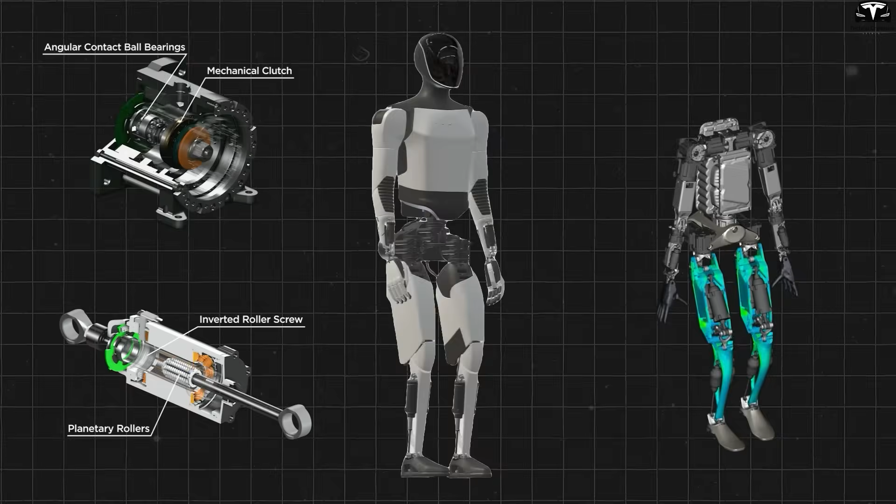We've got one major hardware revision, which should be done by end of this year or early next. Completing the hardware is a crucial step for Tesla Optimus to adapt to and effectively handle a wide range of household tasks. Precision in design allows the robot to operate smoothly, saving users both time and effort. So how will the improved design enhance Optimus's performance?

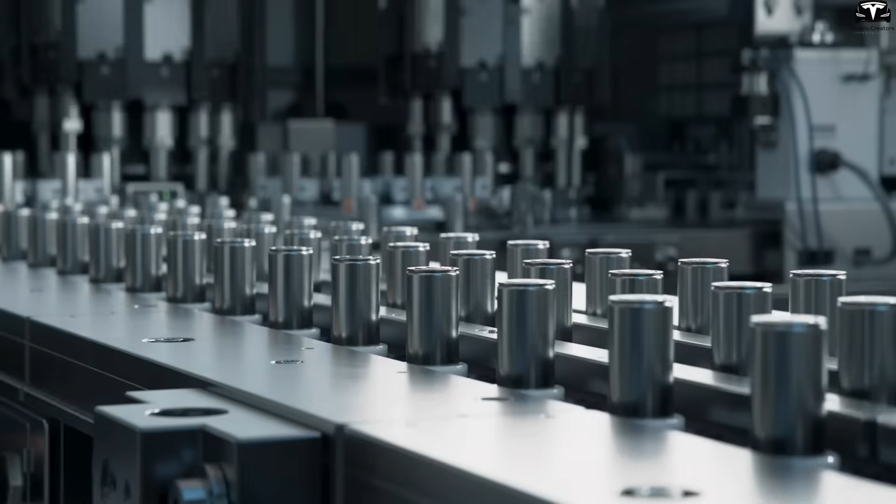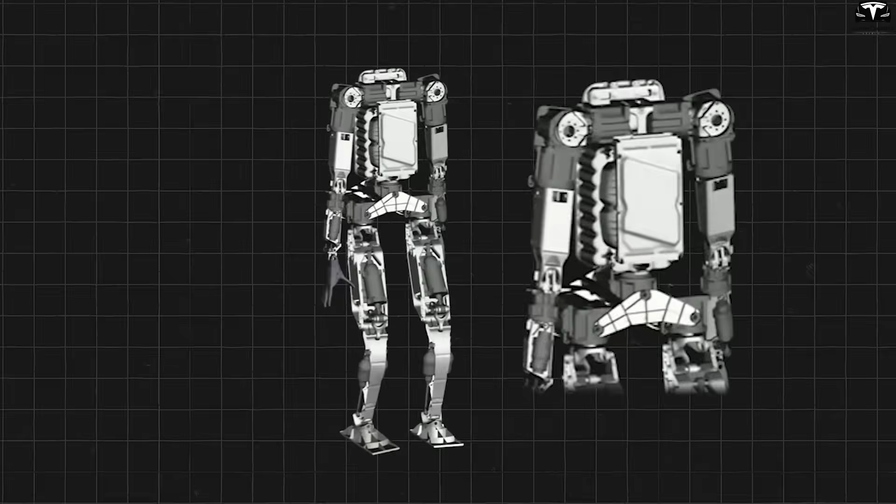How does the power supply system of Tesla's Optimus work? Tesla is currently using its familiar 4680 battery cell to power the Optimus robot, but not everyone agrees that this is the most optimal choice for a humanoid robot. While the robot's body is large enough to accommodate these oversized battery cells, achieving the necessary voltage level around 48 volts requires Optimus to use about 90 cells.

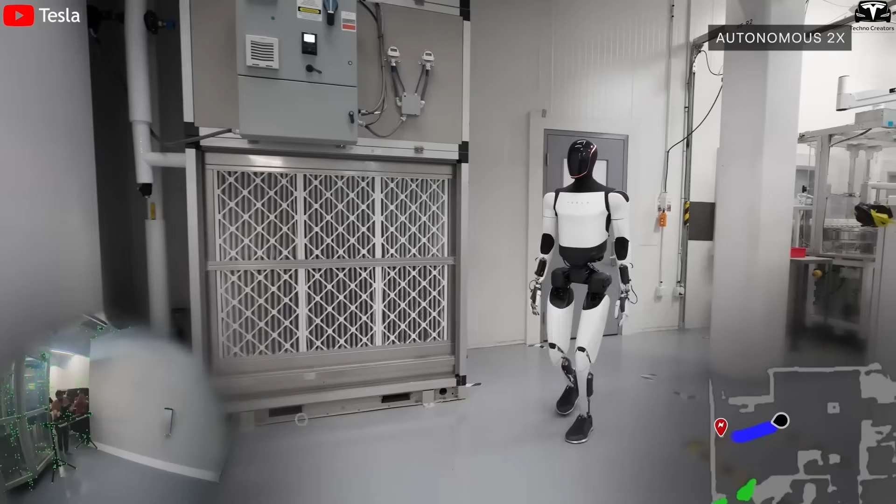Tesla has revealed that the total battery capacity is 2.3 kilowatt-hours, which is enough for the robot to operate continuously for 12 hours in a home environment, from walking around the kitchen and cleaning the living room to assisting in child or elderly care. After 12 hours, Optimus can autonomously return to a home charging station to recharge. The charging time is just about 1 hour, after which it can resume work. Since it is a robot, it doesn't need rest like humans, and can operate all day as long as it's recharged in time.

Tesla chose the 48-volt level because it's considered safe for human interaction. Higher voltages could be dangerous in close contact environments. However, to ensure stable operation and provide redundancy in case some cells fail, Optimus will likely require a modular battery system, dividing the battery into multiple 48-volt packs, connected in parallel. This approach boosts power output, improves replaceability, and is safer in case one module encounters an issue.

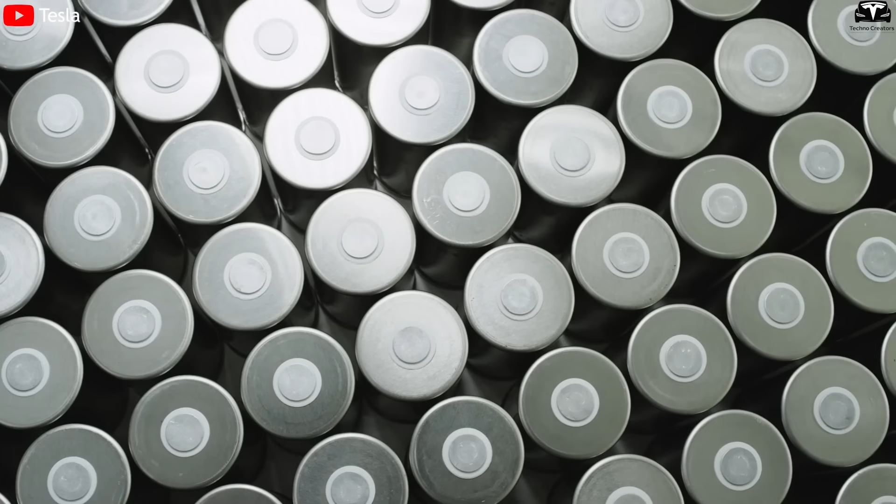With the 4680 cell offering around 26 amp-hours, using two 48-volt modules is enough to reach the 2.3 kilowatt-hour total. If smaller cells like the 2170, around 5 amp-hours, were used instead, about 10 modules would be needed, making the system more complex, taking up more space and increasing costs. Therefore, using large cells like the 4680 remains a sensible solution, especially since Tesla has full control over large-scale production at Giga Nevada.

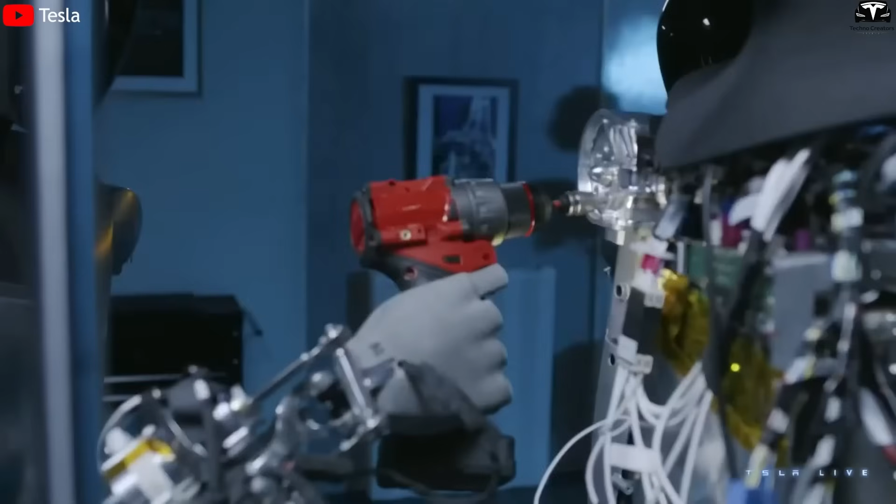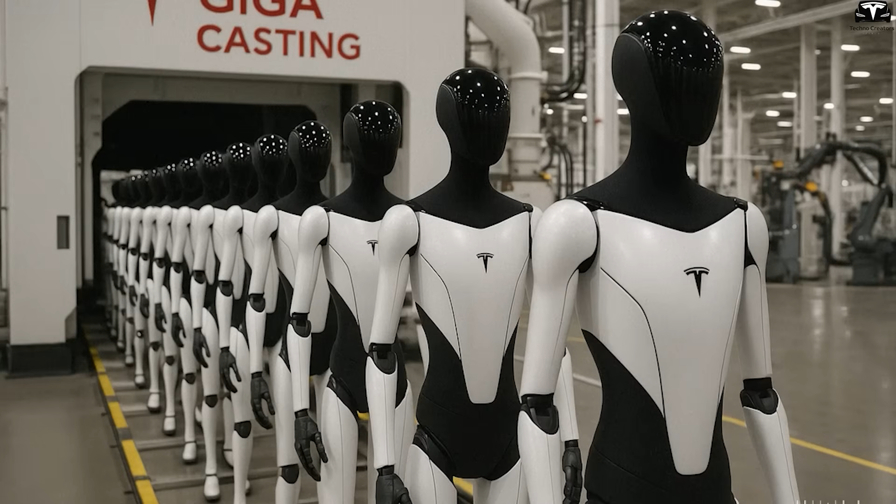Inside the factory, Optimus will face much more demanding tasks than home cleaning, such as lifting heavy objects, tightening bolts, and inspecting components, so the battery will drain faster. However, thanks to fast charging technology, it only takes about 30 minutes for the robot to recharge enough to resume a shift. Tesla may also implement a rotation model, where while one group of Optimus units is working, another group recharges, ensuring the production line runs without interruption.

Another interesting aspect is that Tesla may be integrating a regenerative energy system. This means when the robot lowers an object or moves slowly, some excess energy can be recovered and fed back into the battery. This helps extend the operating time without increasing battery size.

Moreover, Optimus's battery management system is integrated with AI. That means the robot can adjust its power consumption depending on the task, using less energy for light tasks and ramping up output for heavier ones. This is a major differentiator compared to rivals like Figure AI or Boston Dynamics, which still rely on traditional battery systems.

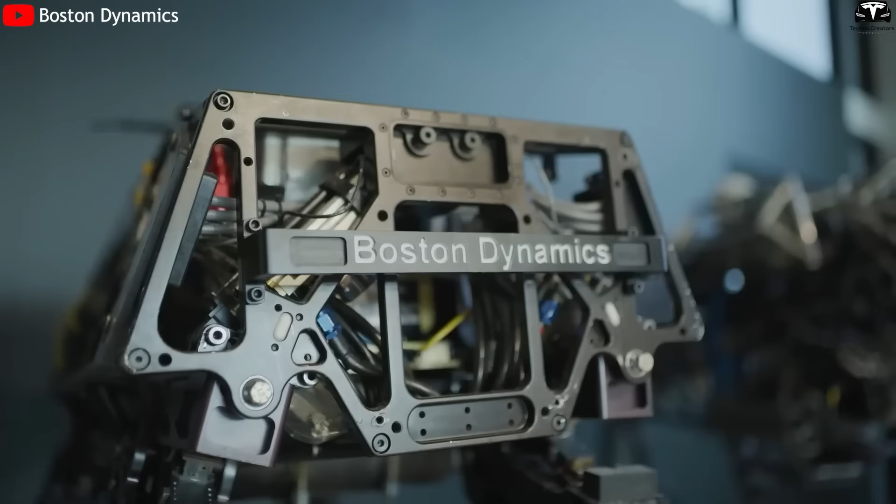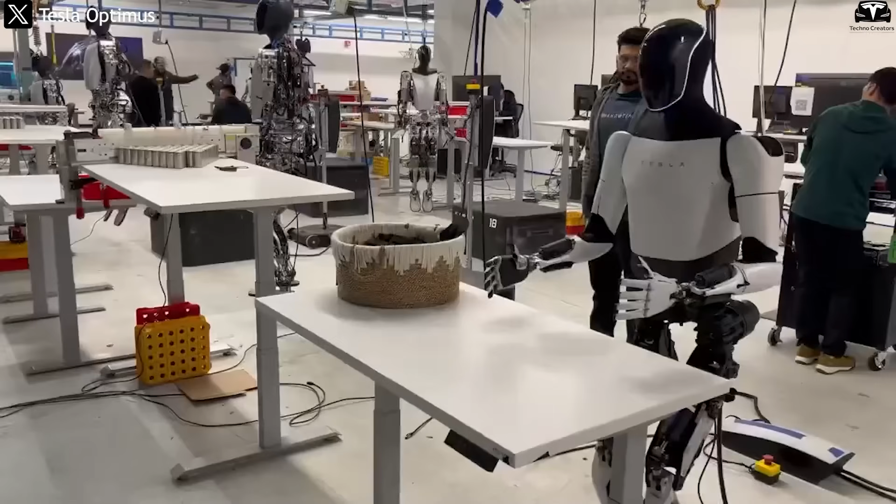In the future, Tesla may also experiment with solid-state batteries for next-generation robots. These batteries are smaller, lighter, store more energy, and generate less heat. If that happens, Optimus could operate twice as long without adding weight, extremely beneficial for industrial or service environments. In summary, although there is still some debate around using 4680 cells for Optimus, given Tesla's long-term strategy and in-house battery production capabilities, this is a technically sound and cost-effective move.

What changes have been made to Optimus's charging system? At first, many assumed that Optimus would share the same charging system as Tesla's electric vehicles like the Model 3 or Cybertruck. However, reality turned out to be completely different.

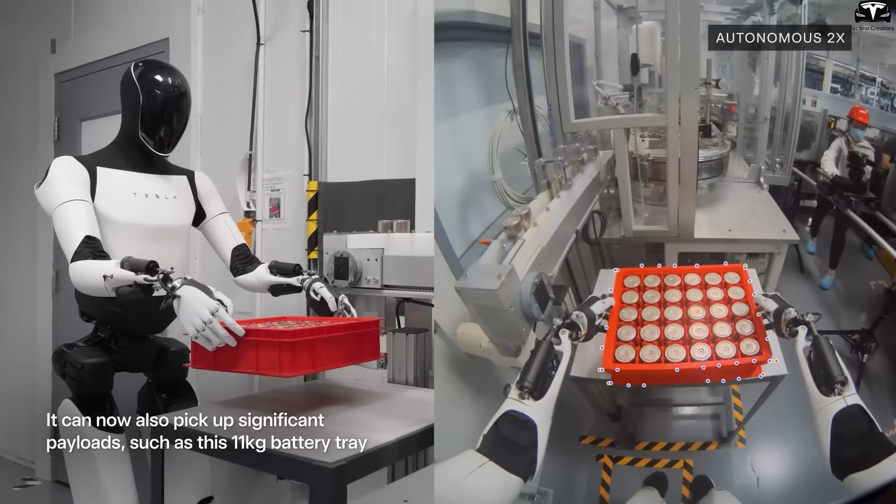In the testing video released by Tesla, Optimus is shown using a dedicated charging station, minimalist in design and highly mechanical in nature. Interestingly, when the battery level drops to 15%, the robot proactively stops working. The LED light on its head turns red as a warning signal, and it automatically activates its navigation system to seek out the nearest charging dock.

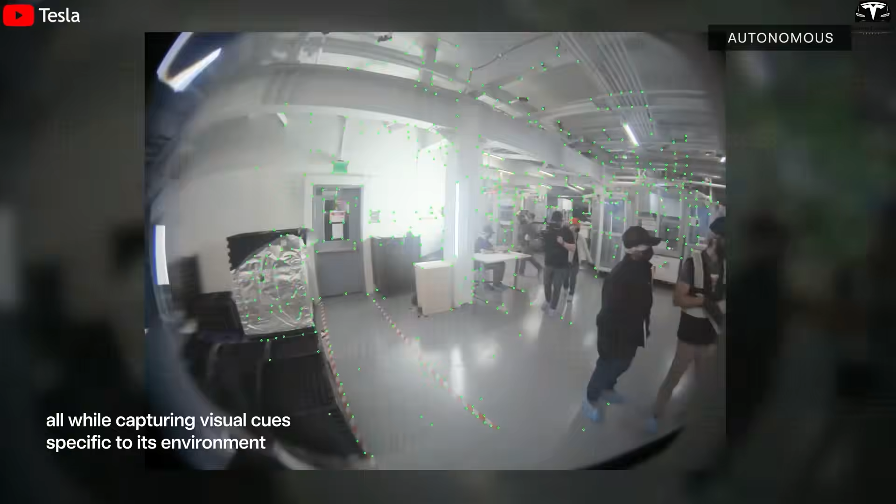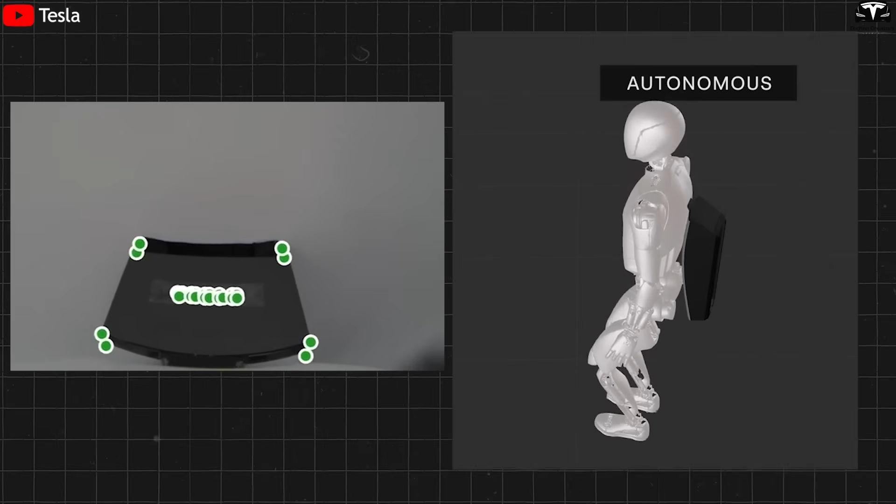What surprises many is the location of the charging port. It's on the back, not on the side or near the legs as previously speculated. This means Optimus must rely entirely on its cameras and visual sensors to precisely locate the charger and align its body so the charging connector can dock accurately, a process that must be both fast and gentle to avoid damaging the port.

Tesla clearly put a lot of effort into this aspect, as even a misalignment of just a few millimeters could prevent the robot from charging or cause wear on the connector.

Once fully charged, the LED turns green, signaling that the robot is ready to resume its tasks. Optimus then autonomously unplugs and continues working without any human intervention.

This entire process happens automatically, as if a diligent employee knows exactly when to take a break and when to return to work. One particularly unique feature of the charging system is that it's not just a stream of electricity flowing in. It's controlled by finely tuned algorithms that adjust the current based on the time of day, battery temperature,

and even the robot's usage history. Thanks to this, Optimus can charge quickly, without degrading battery lifespan, while always maintaining stable performance when it returns to work.

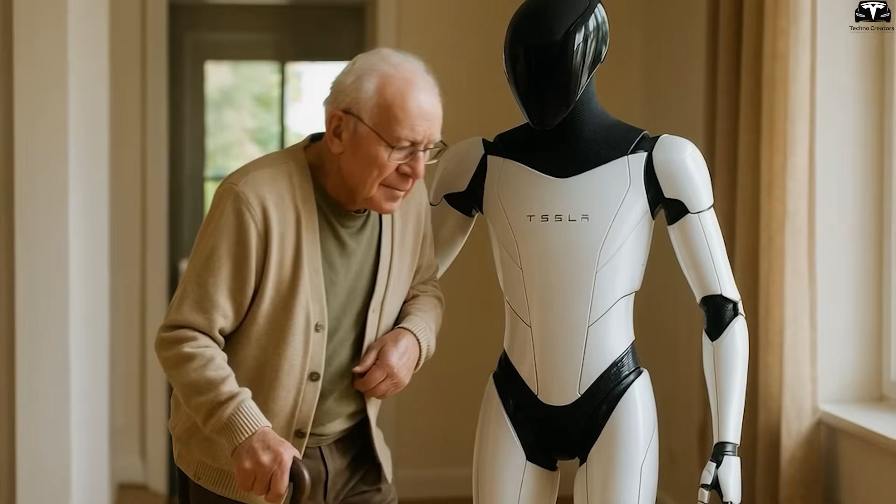This self-charging mechanism is reminiscent of the plug-and-charge system used in Tesla's Cybercab models, but it has now been adapted for humanoid robots, a major leap in flexibility.

Imagine a home or factory where Optimus roams freely, locating chargers whether embedded in a living room wall or tucked away in a factory corner, and recharging itself as naturally as a human grabbing a drink of water after tiring.

Even further, Optimus's system goes beyond smart charging. It enables shared learning. Just like people exchange messages in a group chat, every time an Optimus learns something from

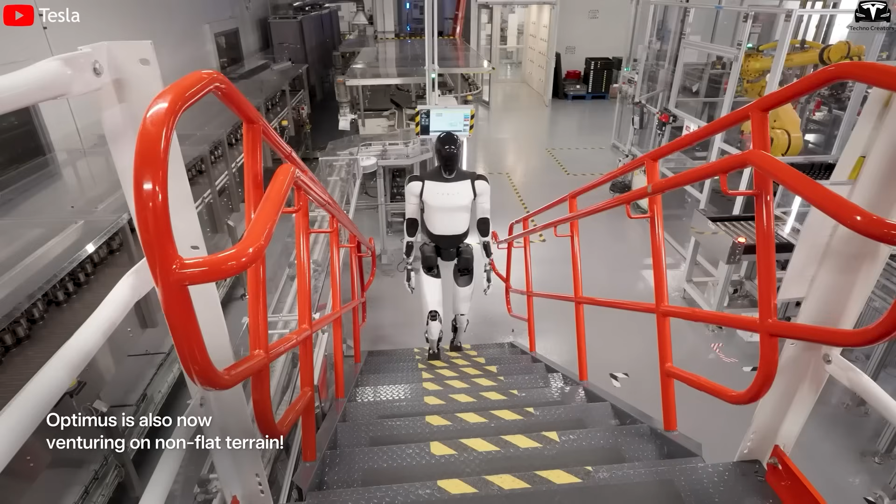avoiding an obstacle to optimizing movement in tight spaces, that knowledge is synchronized across the entire robot fleet. This means every Optimus improves together without each needing to learn from scratch.

Thanks to this group learning capability, if one Optimus in the Texas factory encounters an unfamiliar situation and solves it, just minutes later, an Optimus in Berlin or Shanghai will know how to handle it too.

Tesla refers to this as collective learning, a form of decentralized AI with rapid, cross-updating ability.

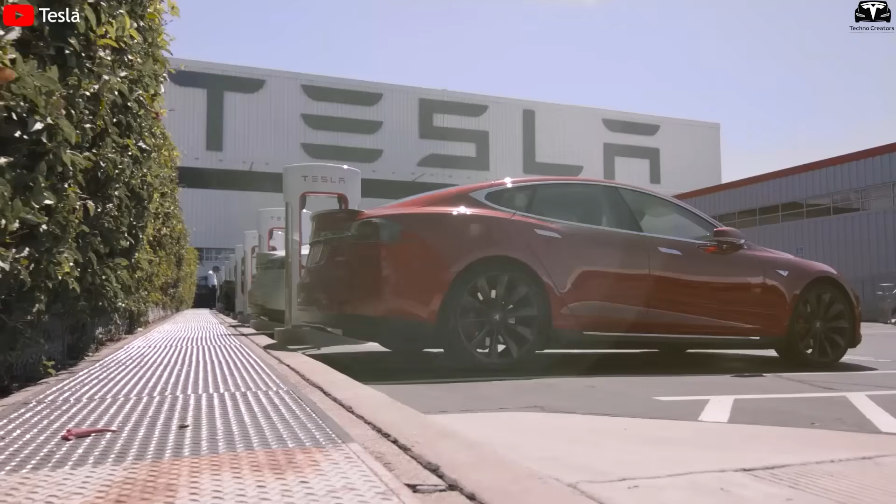At present, only Tesla can execute this at such a large scale because it owns the full stack: computing infrastructure, hardware, and real-world data. The ability to share movement maps, reflex behaviors, and even job-specific tricks means Optimus is not

just a robot that works, it's a living part of a continuously learning ecosystem.

This becomes especially valuable when Tesla deploys thousands of these robots across factories, where each Optimus has its own role, but operates in harmony with the rest like a well-synchronized team.

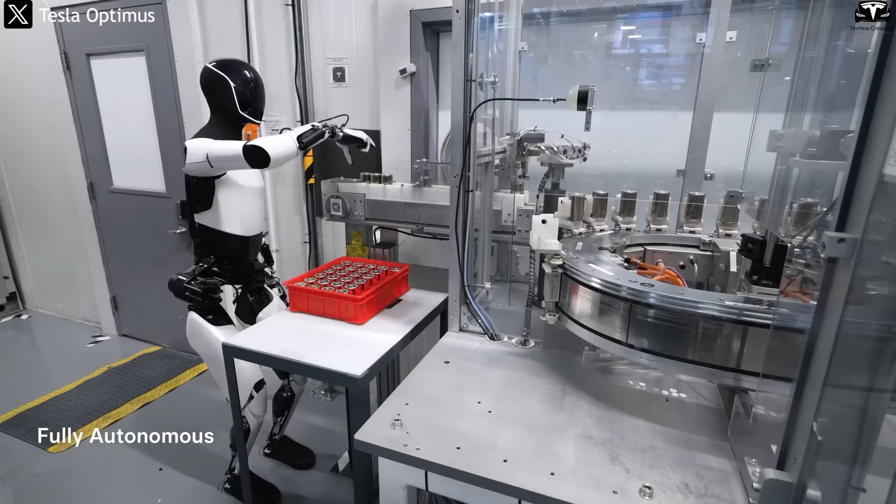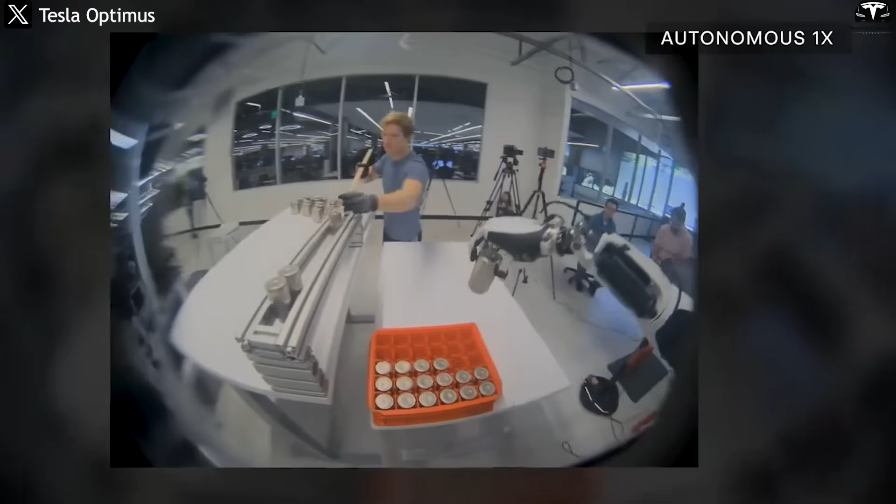In a real-world scenario, one could imagine hundreds of Optimus robots working in shifts unfazed by breaks, fatigue, or emotional lapses. Whenever energy is low, a robot silently retreats to the rear, while another steps up to take its place, ensuring the production cycle never breaks.

As a result, productivity could increase dozens or even hundreds of times compared to traditional labor models. All of this happens in silence, with order, and with astonishing precision.

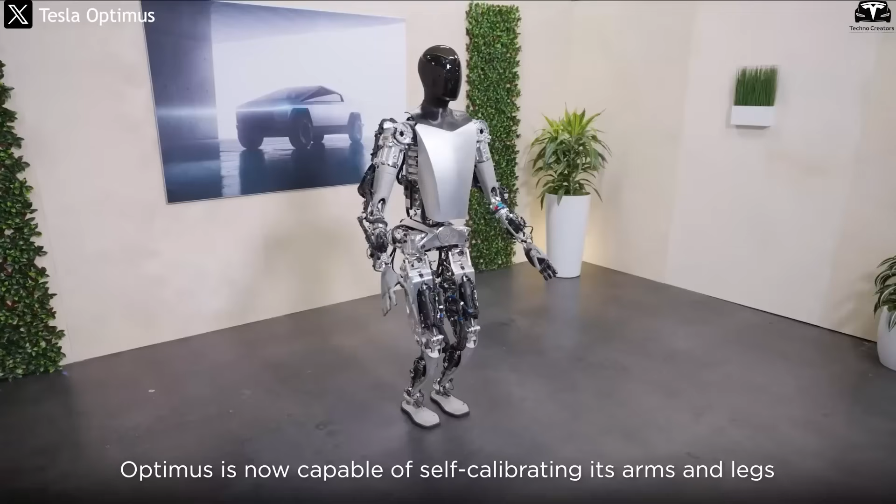The charging system, data connectivity, and self-adjusting capabilities of Optimus are not merely technological upgrades. They form the backbone of Tesla's vision for a fully autonomous robot workforce.

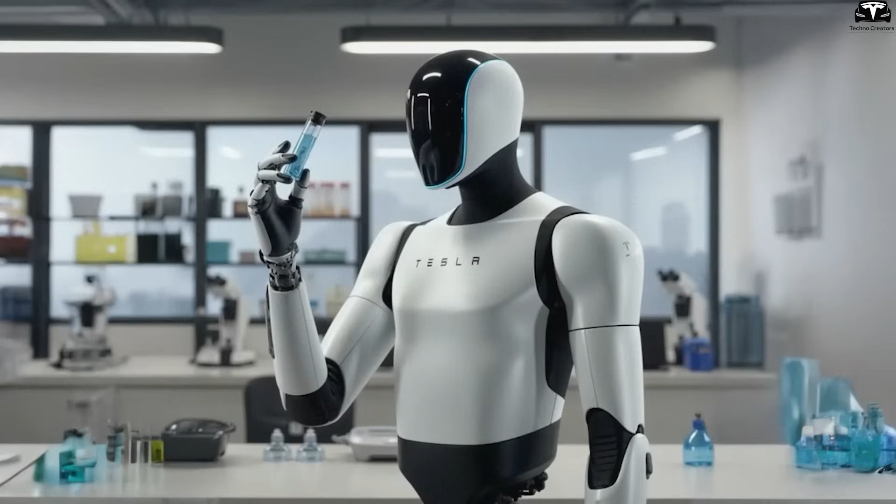This marks the beginning of a new era in automation, where machines don't just perform tasks, they learn, adapt, and evolve as part of a dynamic living network.

How does Optimus Gen 3 communicate with humans? One of the most significant upgrades in Optimus Gen 3 is its ability to communicate via voice, a feature confirmed by Elon Musk for the new version.

This marks a major leap from Optimus Gen 2, which operated silently with limited interaction. With storytelling capabilities, advice-giving, and casual conversation, the robot becomes not only easier to control, but also closer to being

a genuine companion in everyday life, something most robots on the market today have yet to achieve. Optimus Gen 3 is equipped with a 7-inch touchscreen on its torso, providing an intuitive, interactive interface.

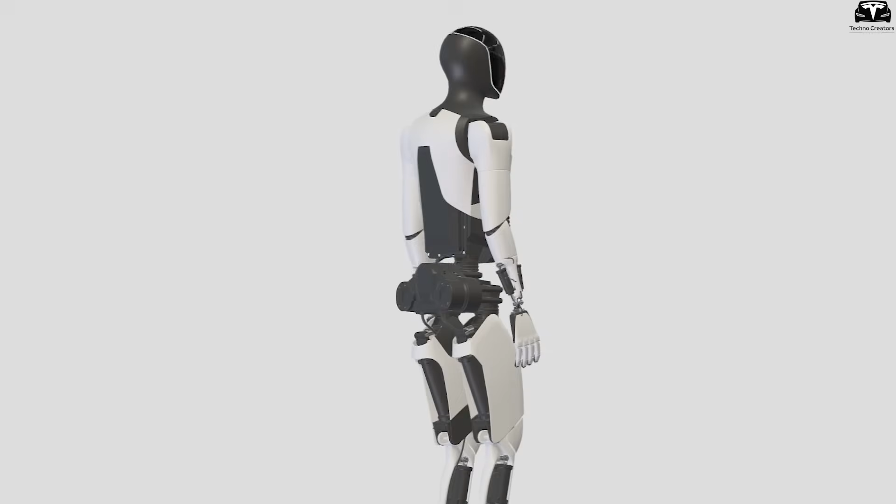Its voice control system supports up to 15 languages and features a speech recognition accuracy of 95%, along with gesture analysis capability reaching 90%, enabling it to comprehend body language as well.

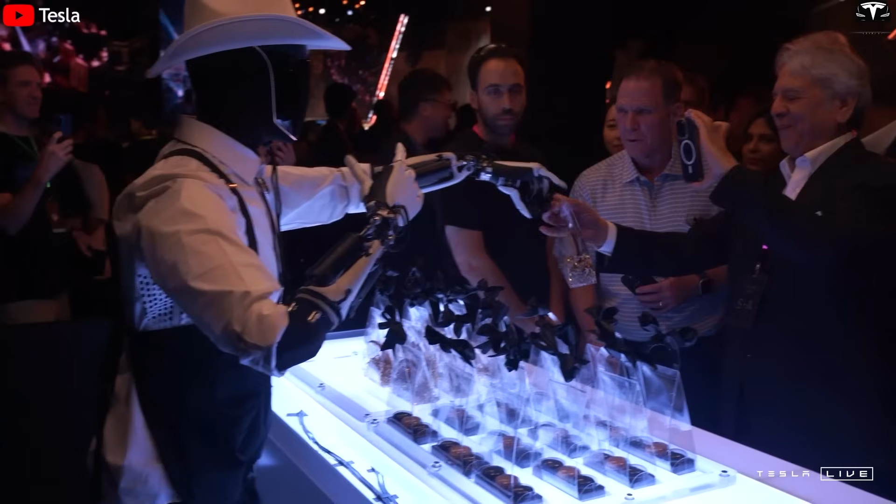This is particularly useful in home or healthcare settings, where understanding a user's intentions, both verbal and nonverbal, is crucial. This gives Optimus a clear edge over competitors like Figure AI or Digit, which emphasize locomotion but lack depth in human interaction and communication.

Beyond simply understanding and responding, Optimus Gen 3 can adapt its behavior to individual users through integrated AI models. This allows the robot to adjust its tone, attitude, and speech style based on the user's age, circumstances, and emotional state.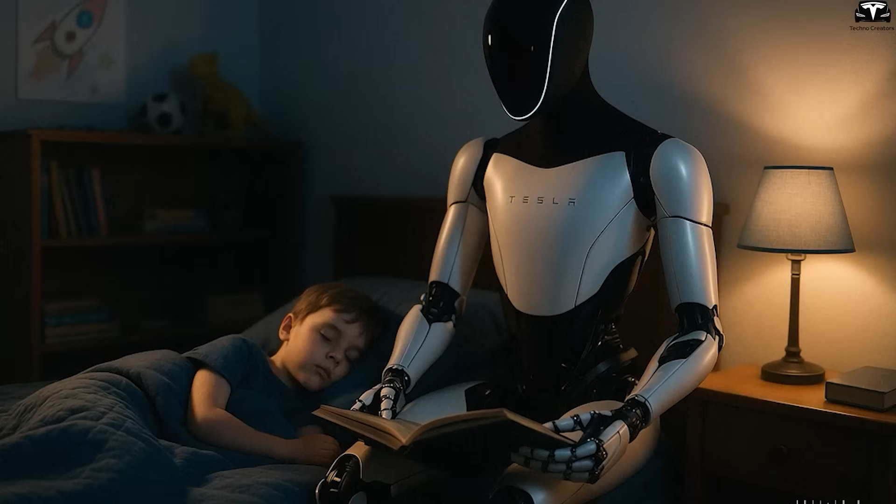For the elderly, it can speak in a calm, soothing tone, remind them to take medication, or share nostalgic stories. For children, it can be lively and playful, telling fairy tales or interacting as a learning and play companion.

This level of personalization far surpasses platforms like Alexa or Google Assistant, positioning Tesla as a pioneer in the personal interactive robot space.

This adaptability makes Optimus an ideal choice for households, where it can act not only as a support tool but also as a companion, caregiver, and even emotional therapist.

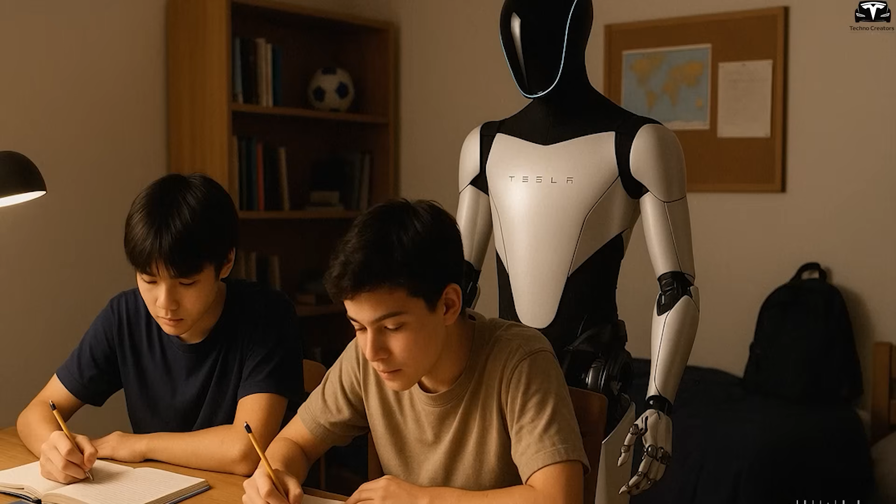With rapidly aging populations, especially in developed countries, the need for empathetic, supportive, and communicative devices is growing. Optimus can help the elderly monitor their health proactively, deliver timely reminders, and ease loneliness by providing someone to talk to. For children, it can serve as a learning assistant and playmate, opening up vast potential in interactive education.

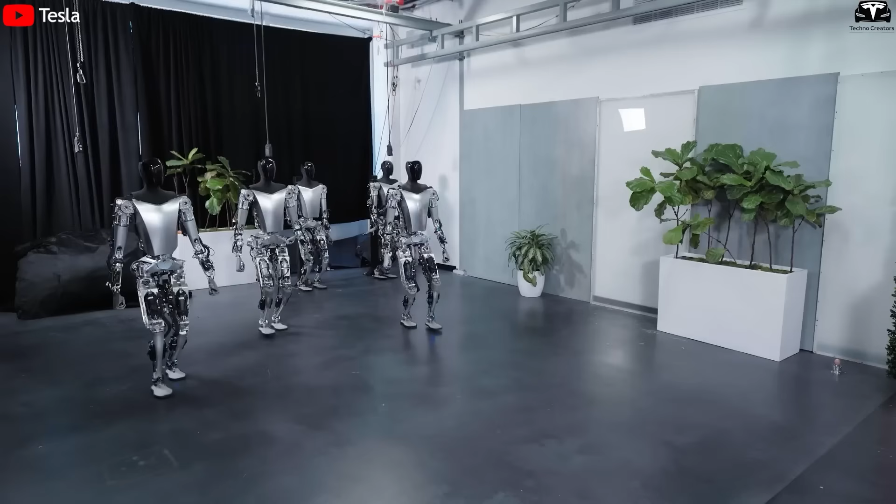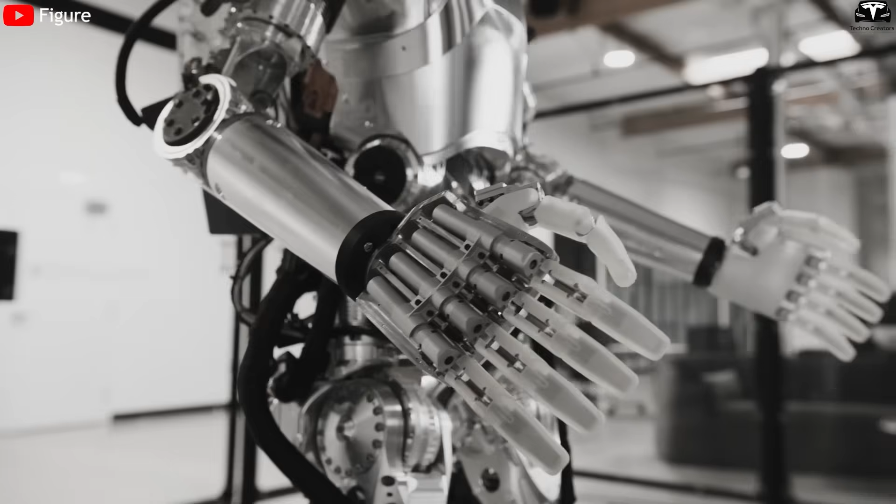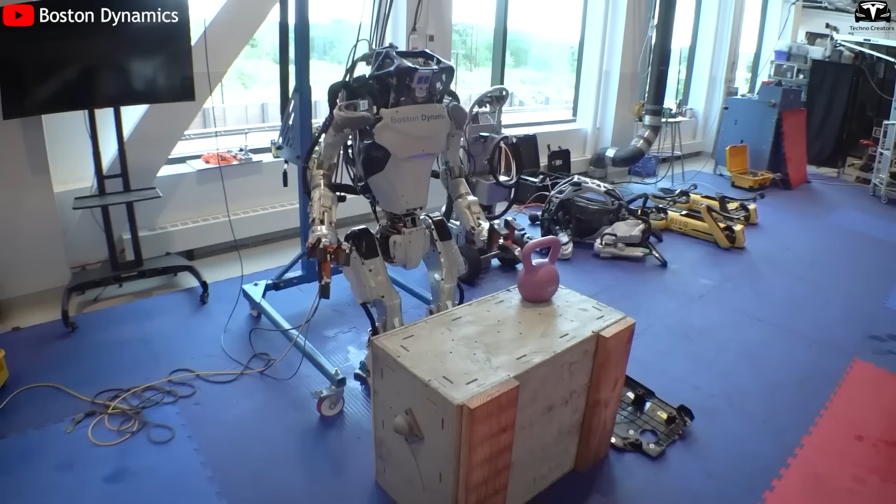Compared to its current competitors, Optimus Gen 3 is clearly ahead thanks to the seamless integration of hardware, software, and artificial intelligence. Figure AI's Figure 01 has achieved walking and object handling capabilities, but lacks a voice communication or behavioral system. Boston Dynamics' Atlas impresses with complex mobility, but it doesn't focus on human communication or emotional understanding. Even service robots like SoftBank's Pepper, though capable of basic conversation, remain limited to simple responses and cannot tailor behavior to individual users.

Tesla, on the other hand, leverages its immense AI training ecosystem, from billions of kilometers of autonomous driving data to home cameras, smart devices, and image recognition technology, to build a robotic platform that understands and learns more like a human than any competitor.

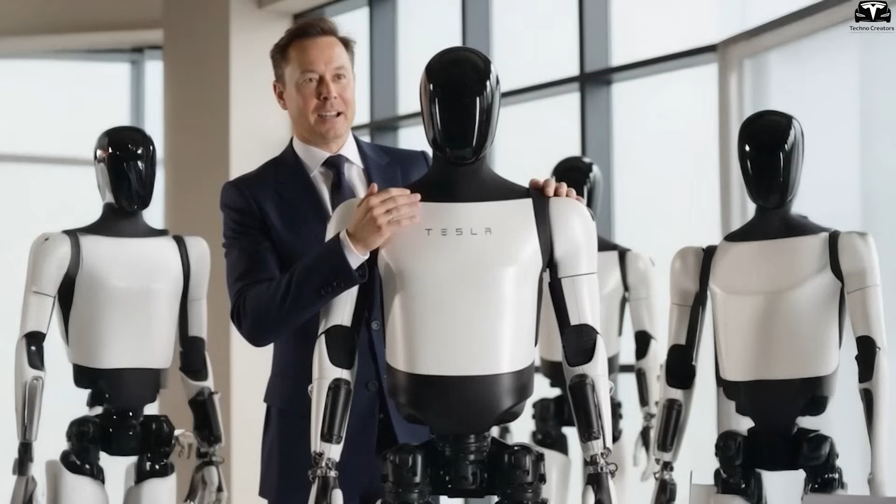Optimus Gen 3 is not merely a communication robot. It also serves as the control hub of a smart home. Integrated with the Tesla home ecosystem, the robot can connect with and control lighting, air conditioning, door locks, curtains, heating systems, security cameras, and even Powerwall energy storage units. This turns Optimus into a context-aware smart butler, automatically closing windows when it rains, opening curtains at sunrise, or issuing alerts when unfamiliar individuals are detected. This holistic vision far exceeds that of current rivals, which mostly focus on movement or isolated reactions.

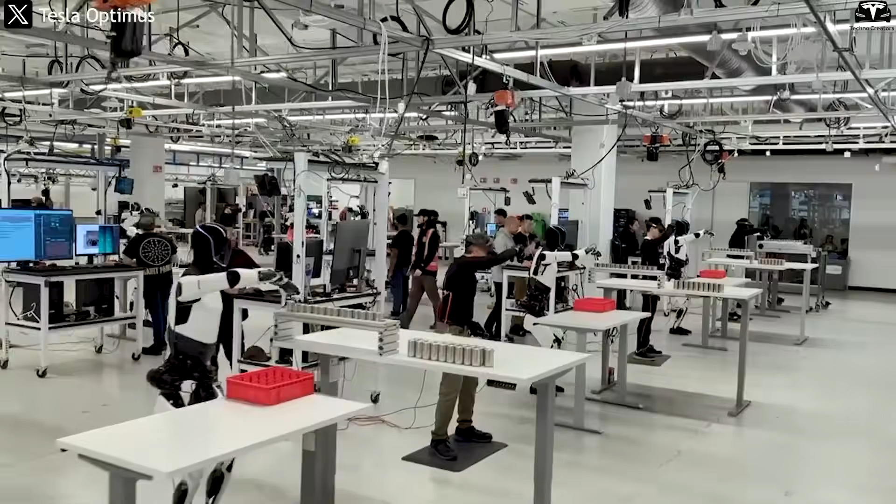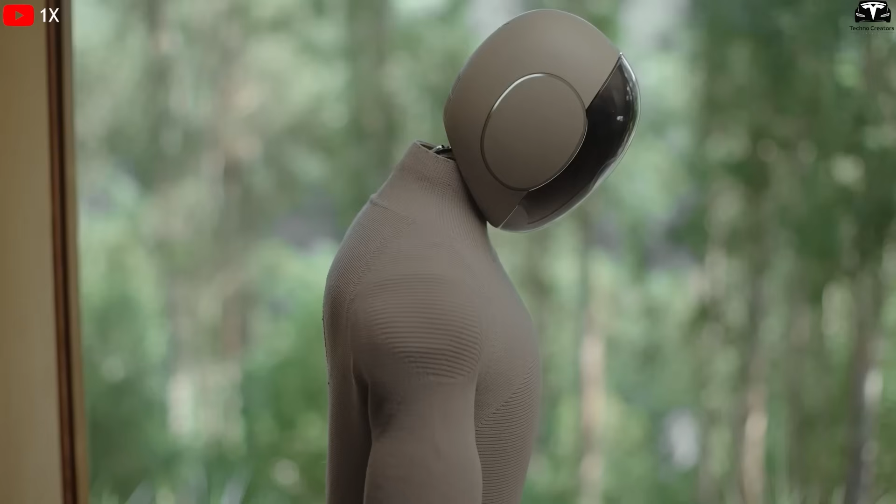From a socio-economic perspective, the arrival of Optimus Gen 3 signals a transformative shift in how humans approach labor and caregiving. If Tesla can produce 10,000 units annually and gradually reduce the cost to below $20,000 per unit, then deploying just a few million units could establish a trillion-dollar robot industry. In sectors like healthcare, education, retail, and in-home services, a robot capable of intelligent communication, emotional awareness, and task efficiency would significantly reshape labor structures, especially in countries facing labor shortages.

Milan Kovac, a software engineer at Tesla Robotics, shared on X that Optimus Gen 3 is rapidly improving through full simulation training with reinforcement learning. The sim-to-real system has been optimized with key updates. The cable is only a safety precaution and doesn't affect performance. Early results show Tesla Bot is nearing high stability and refinement.

What makes Optimus Gen 3 improve so rapidly in such a short time?

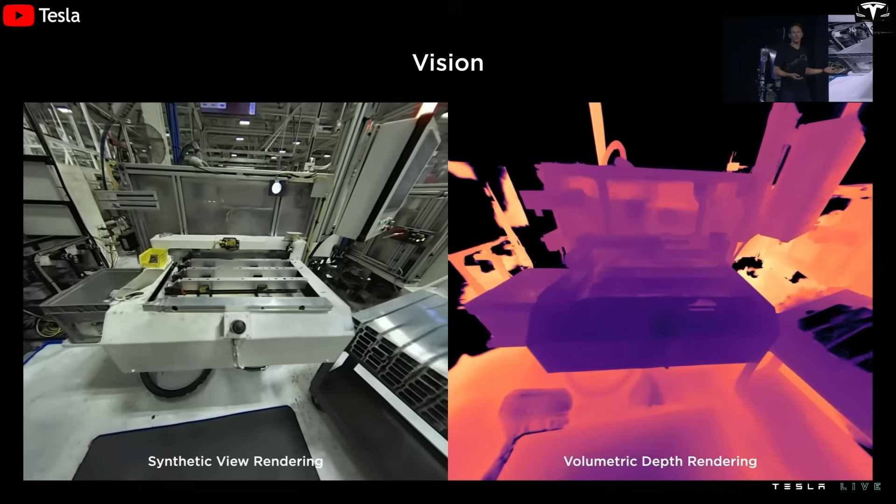What is Tesla aiming to achieve by training the Optimus robot through simulation? Tesla is taking a very modern approach to training the humanoid robot Optimus, training it entirely in a simulated environment using reinforcement learning (RL). This is a type of machine learning where the robot explores and improves its abilities through trial and error in millions of different simulated scenarios.

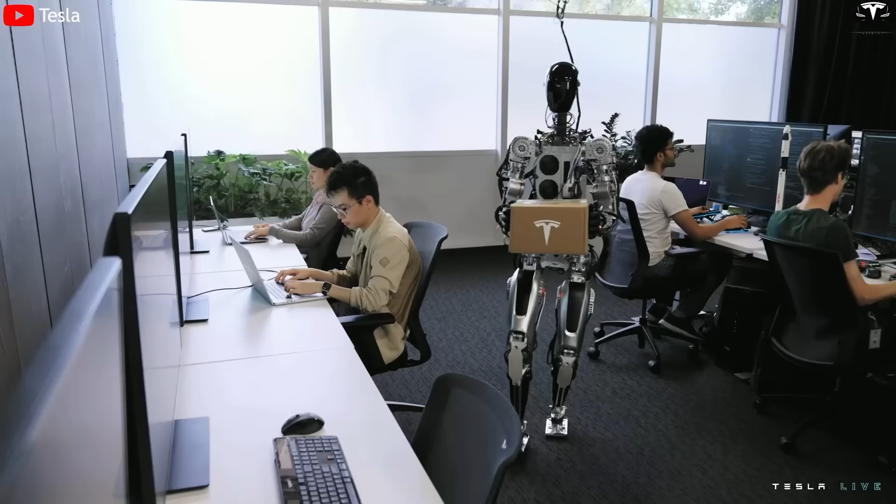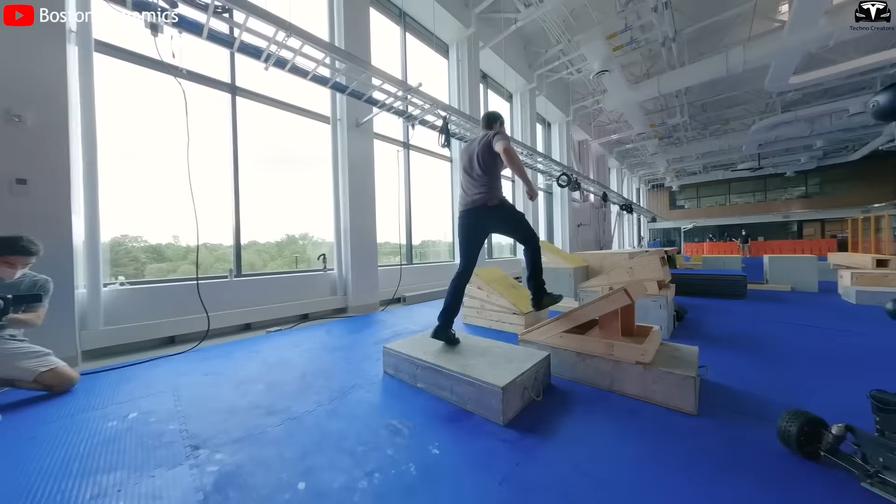What are the practical benefits and significance of training fully through simulation with reinforcement learning, RL? In reality, simulation training offers huge advantages, especially in saving time and costs. Instead of building complex physical models and testing each one, Tesla can quickly adjust factors in the virtual environment to try out various operational strategies. As a result, the improvement process becomes much more flexible, faster, and more efficient.

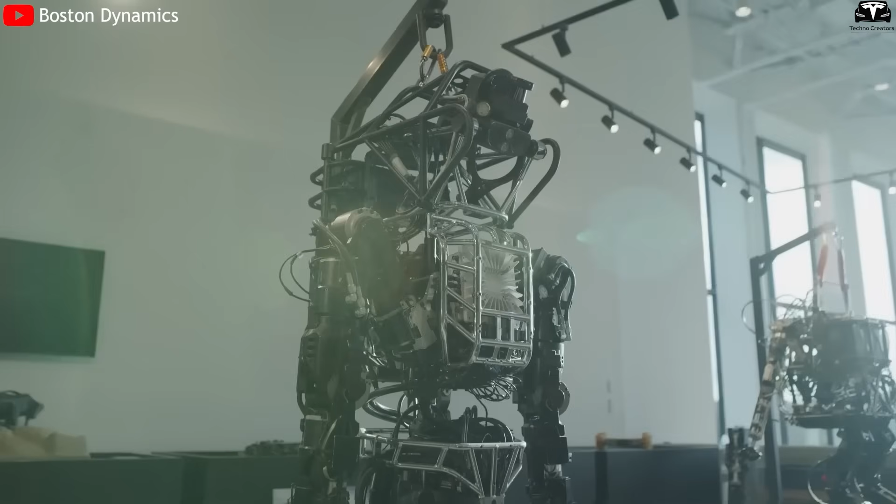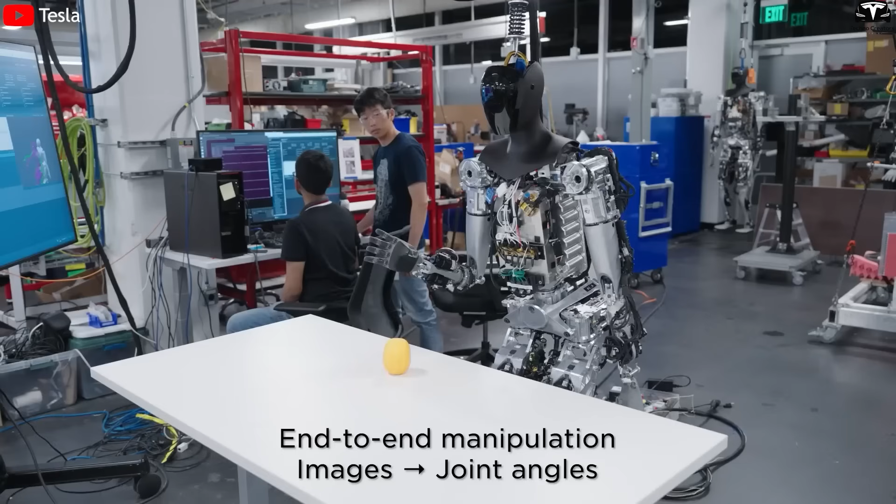Compared to other companies developing humanoid robots like Boston Dynamics with their Atlas robot, Tesla aims to accelerate progress by heavily investing in computing infrastructure and software. While other robots might take months or even years to master a basic skill, Tesla believes simulation can significantly shorten the stage. Every algorithm update can be tested immediately in the virtual environment without waiting for the physical robot. This is why Tesla is confident they can speed up the commercialization of Optimus, aiming for mass production in the near future. However, training in simulation does not mean the work is done.

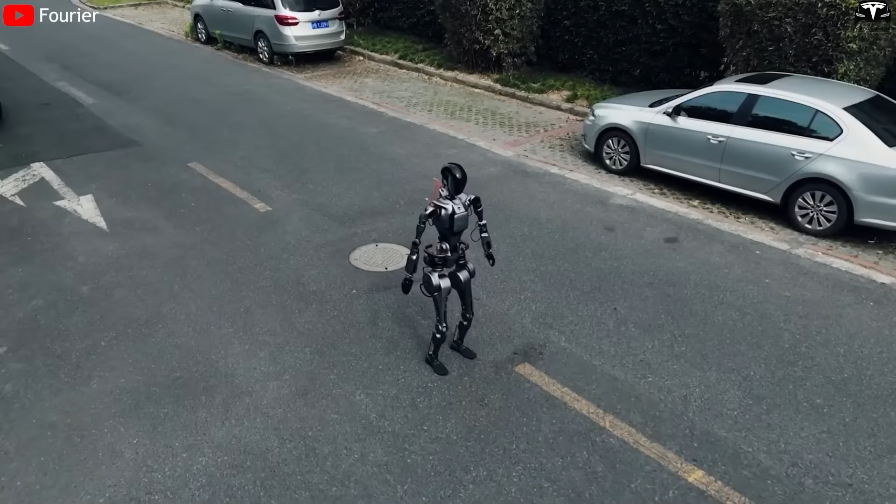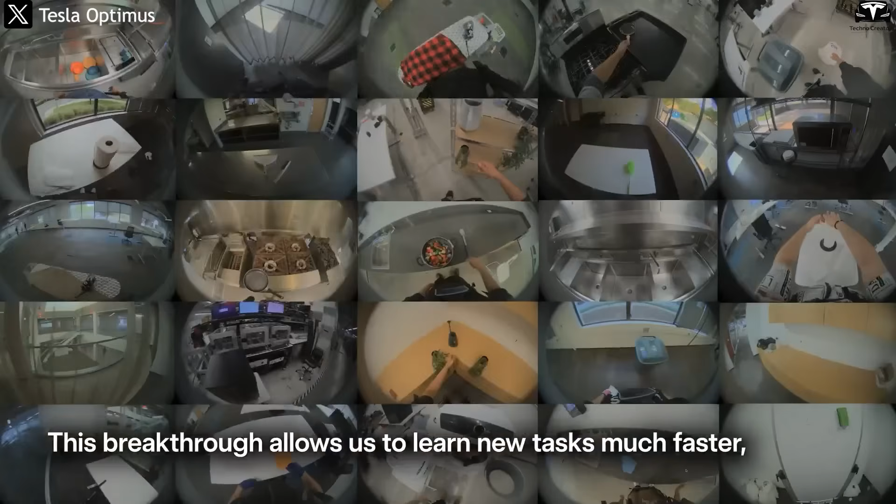There is another crucial step called sim-to-real transfer, which means transferring the skills learned in simulation to the real world. What role does optimizing and fixing errors in sim-to-real code play in robot development? In practice, the real environment always contains uncertainties and differences compared to simulation. If a robot is only good in virtual environments but clumsy in real life, it is useless. That's why Tesla focuses heavily on optimizing sim-to-real code, minimizing the gap between what the robot learns in simulation and what it can actually perform in reality.

If not well handled, the transfer error can reach 20 to 30%, causing the robot to walk unsteadily, grasp incorrectly, or lose orientation. Therefore, Tesla continuously updates, patches, and refines the sim-to-real code to help Optimus work more smoothly and reliably in the real world. Another difference is that Tesla is not just targeting robots for warehouse or factory work like Figure AI or Agility Robotics, but wants to create a robot that can adapt to human living environments, from homes to factories.

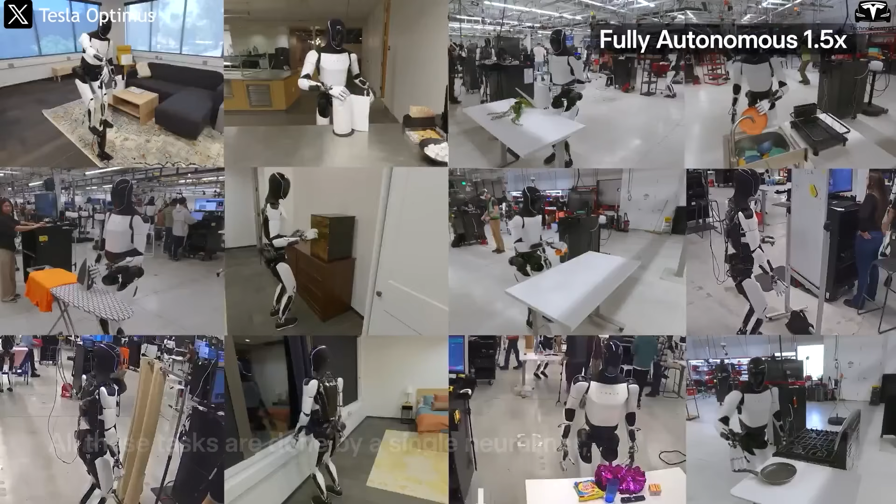This makes their sim-to-real challenge far more complex because the robot must handle many unpredictable situations. Carefully fine-tuning the transfer from simulation to reality is the key for Optimus to function well in diverse environments.

In Tesla's test videos, many have noticed that Optimus is supported by a cable during trials. Why does Tesla use support cables in the early testing phase, and how does it affect development?

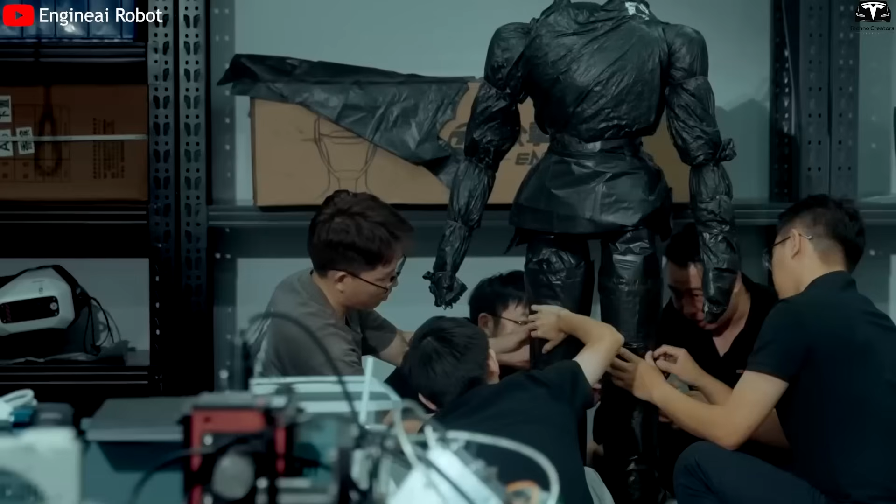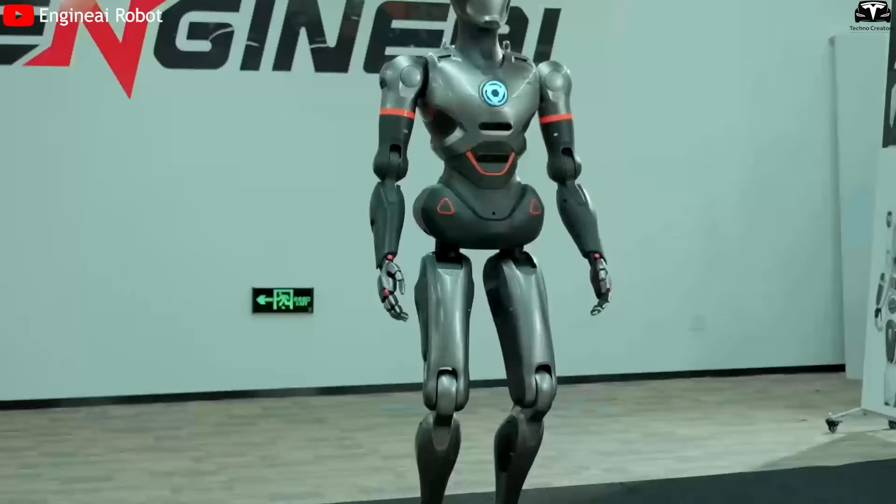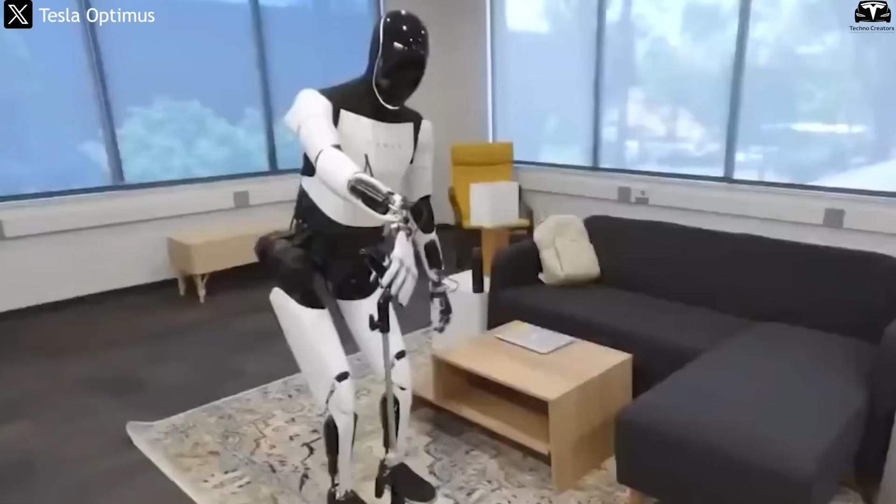Actually, using support cables is very common in the humanoid robotics industry. The main purpose is to prevent serious damage to the robot while it is learning to walk, lift objects, or maintain balance. Tesla also clearly explains that the cable is not to hold the robot still, but to prevent falls when control is not yet stable, especially in the early unstable phase. The cable makes testing safer and smoother.

Thanks to this, the development team can check many difficult movements without worrying about time-consuming repairs or reassembly after every fall. Boston Dynamics used this method when training Atlas, especially during flips, parkour, or moving over complex terrain. For Tesla, using cables is not only to protect hardware, but also to collect more accurate motion data that will be very valuable later for improving control algorithms.

Looking more broadly, the support cable also reflects Tesla's careful and strategic caution. They are not rushing but building solidly step by step. With this safety net, Tesla can upgrade software and perfect hardware simultaneously without interruptions when the robot encounters errors or malfunctions. This is the foundation that helps them soon reach the stage of testing without cables and be ready for mass production.

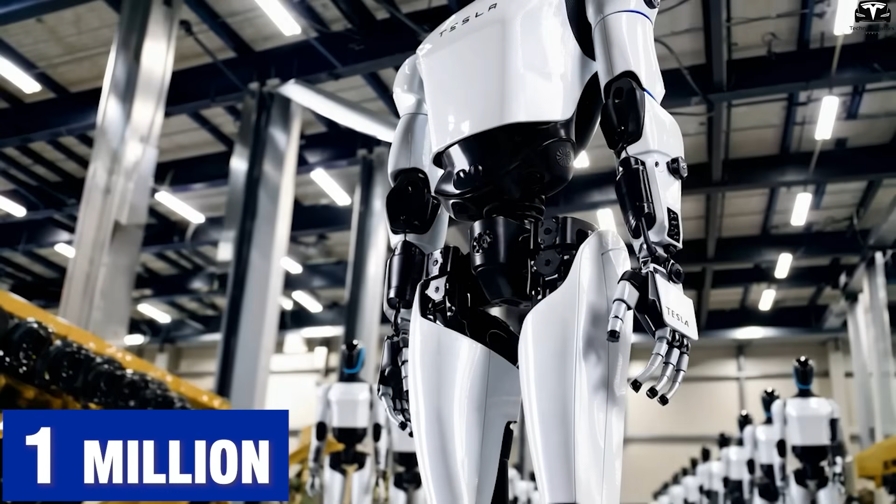Musk is confident that Optimus will scale faster than any product in Tesla's history, targeting production of up to 1 million units annually by around 2029 or 2030. This plan shows an ambition not just to remain at the experimental stage, but to popularize robots in industry and everyday life at an unprecedented scale.

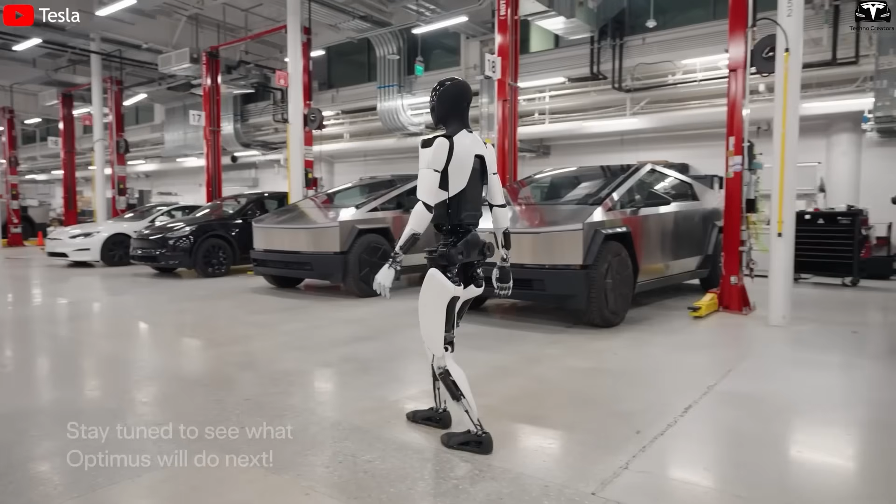At Tesla's Palo Alto laboratory, clear technical progress has been recorded as Optimus can move autonomously in the office, self-charge, and perform tasks flexibly. This not only demonstrates mobility, but also operational autonomy, an essential factor for robots to work effectively in real environments without continuous supervision. This forms the foundation for the rapid expansion Musk mentioned.

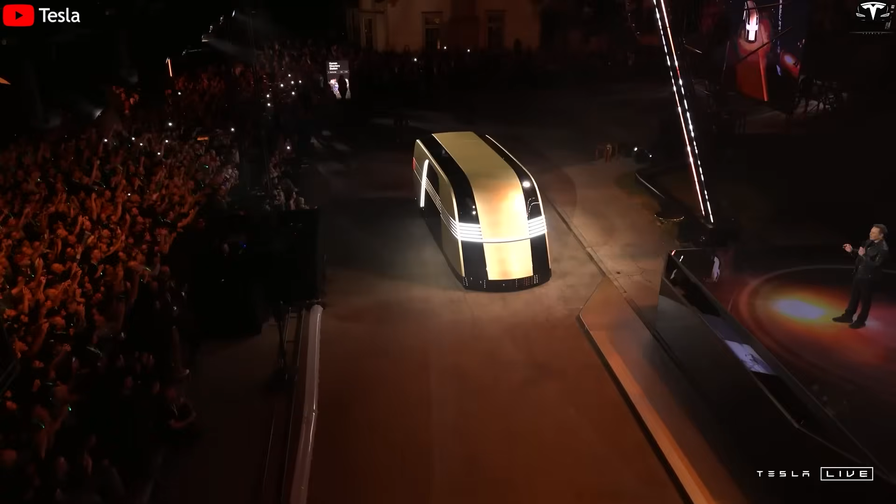In a discussion with Microsoft CEO Satya Nadella, Musk emphasized the practical foundation for robot development. Robotaxi needs to drive safely and precisely, while Optimus must complete assigned tasks accurately. This reflects Tesla's clear vision that robots should not only be demonstration technology, but also meet safety standards and practical performance to deliver real value to users.

Tesla actively showcased Optimus at the We Robot event, with performances serving drinks, customer interaction, and intricate dancing, proving coordination of complex movements and improvements in mechanical and software motion control. The latest dance videos released by Tesla show the robot increasingly demonstrating softness, precision, and flexibility, signs of breakthrough progress in refining control algorithms and mechanical structures.

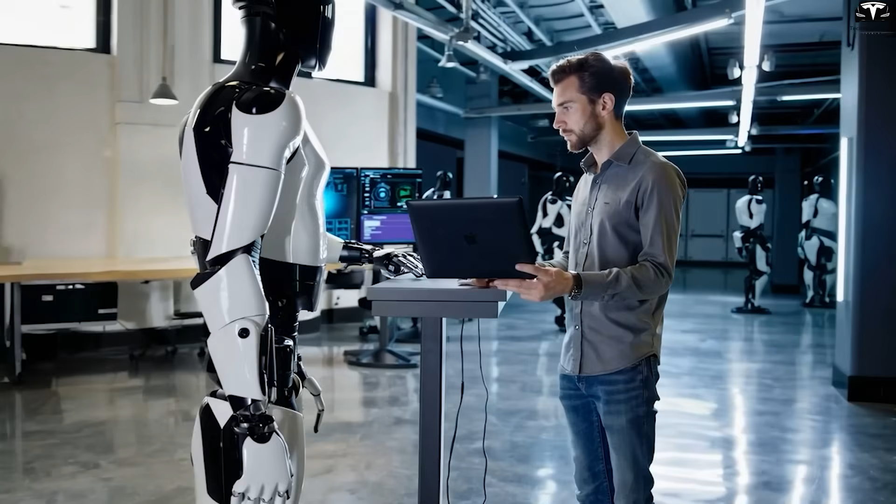Regarding production, Tesla has started limited Optimus manufacturing at the Fremont factory, aiming for over 1,000 units for internal use in 2025, paving the way for market sales in 2026. This is a critical step to perfect the production process, test operational efficiency in real conditions, and accelerate upgrades before scaling up mass production. Internal manufacturing also helps Tesla fine-tune the robot based on real feedback from the factory, ensuring suitability for industrial applications.

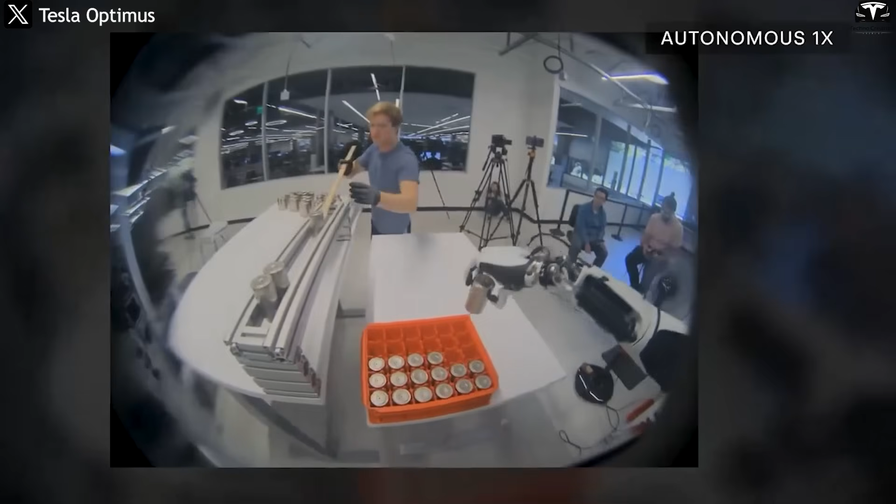Musk also highlights Optimus's huge market potential, valued at $25 trillion, larger than Tesla's automotive business. He believes the robot can reshape the global economy by automating repetitive, low-skill tasks, reducing production and service costs, and opening a prosperous era with cheaper goods and services, improving global living standards. This is a revolutionary vision where robots will not only assist, but transform the economy's functioning.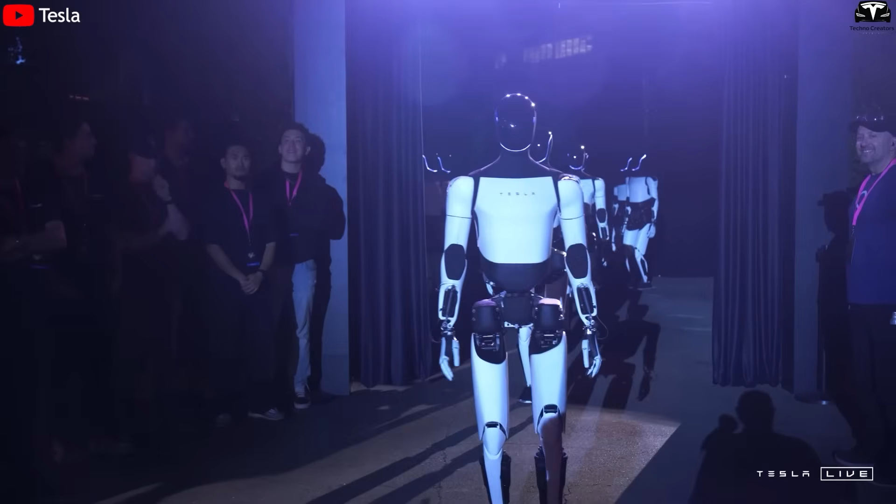Beyond industrial applications, Tesla Optimus has also been presented at diplomatic and public events, where robots performed dances to Trump's music in front of Saudi Arabia's Prince Mohammed bin Salman and President Donald Trump. The performance was not only entertaining but also demonstrated advancements in interaction and precise robot control, enhancing Tesla's image as a technology pioneer on the international stage.

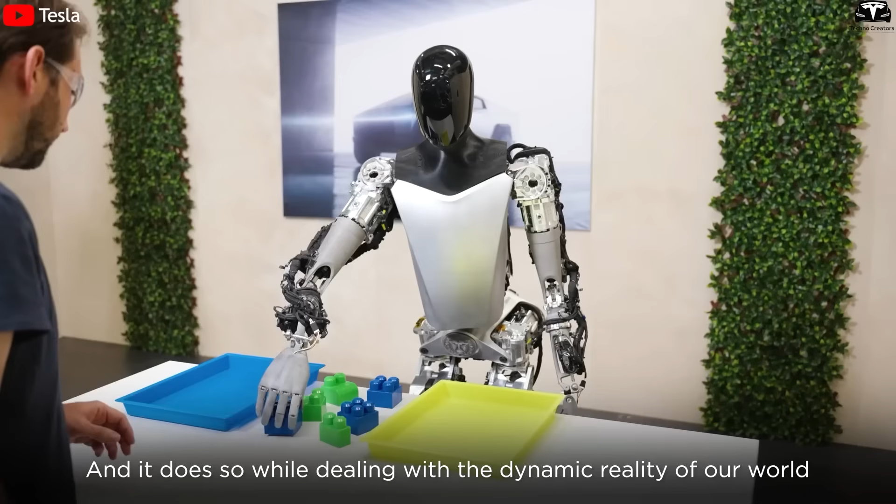Elon Musk emphasizes that training Optimus requires massive computational resources and time. For reference, large AI models like GPT-4 cost millions of dollars in computing during training. Tesla must invest similarly or more to train the robot's capabilities in environment recognition, movement, and diverse task execution.

Regarding competition, the Grok AI bot ranking, May 2025, places Tesla fifth among the world's top humanoid robot manufacturers. Boston Dynamics leads with Atlas due to complex movements like parkour.

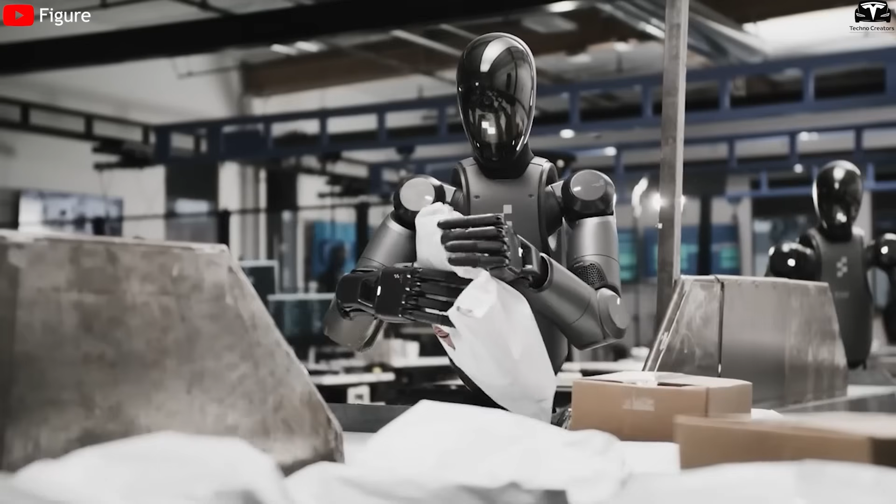Figure AI and Agility Robotics have deployed robots in factories and warehouses, showing advantages in practical applications. Tesla remains in the early stage, with a product not yet widely adopted, needing improvements in stability and production speed.

Tesla began limited Optimus production at the Fremont factory in Q1 2025, aiming for over 1,000 units internally in 2025, with market sales starting in 2026. Musk targets 1 million robots per year by 2029, increasing output by 1,000 times in 4 years, an unprecedented production ramp-up speed in robot or automotive history.

Musk predicts Optimus will become a common personal item, similar to C-3PO or R2-D2 from Star Wars.

With the robot industry's potential value reaching $25 trillion, Tesla expects to optimize repetitive, low-skill tasks, thereby reshaping the global economy. Introducing robots into daily life will reduce labor costs and improve quality of life, but also poses challenges for mass production and developing sophisticated control software.

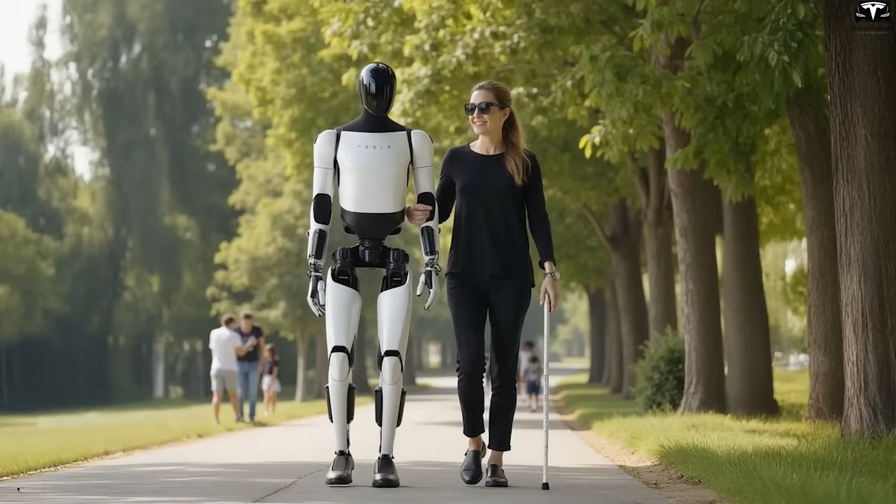Musk believes that within 4 to 5 years, Tesla can produce 1 million Optimus robots annually, launching a personal robot era for millions of households.

What approach is Tesla taking for Optimus in the Middle East? At the 2025 Qatar Economic Forum, Elon Musk captured the audience's attention by introducing Tesla Optimus, Tesla's ambitious humanoid robot. Although no specific plans for Qatar were announced, choosing the Middle East as the venue to showcase Optimus indicates that...

Musk is seriously considering expanding this robot's market into fast-growing economies eager for advanced technology. Could the Middle East be Optimus's next destination? At the event, Elon Musk emphasized plans to deploy thousands of Optimus robots within Tesla's own factories starting from the end of 2025, aiming to produce up to 1 million units annually by...

2027-2029. While bringing Optimus to Qatar may not be part of the initial phase, appearing at such a major international event clearly paves the way to connect with potential partners in the region. Given the rapid urbanization and strong interest in automation in the Middle East, especially in the UAE and Saudi Arabia, the prospects for Optimus there are well-founded.

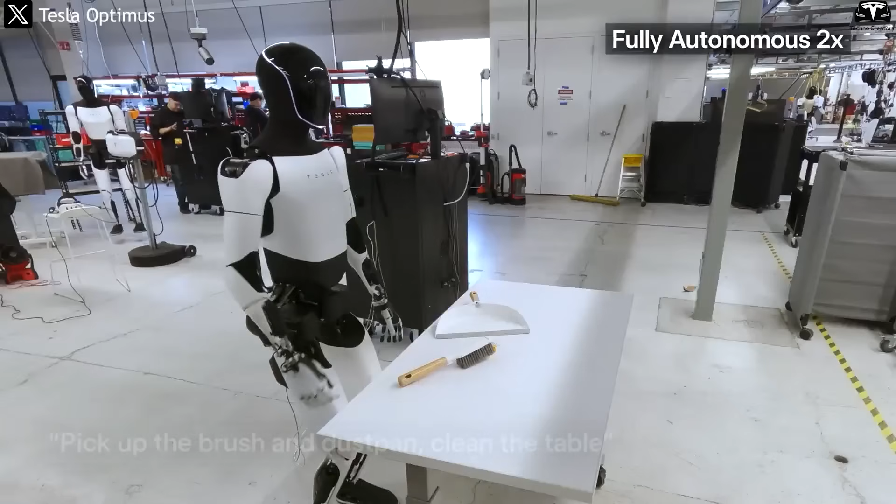In the latest videos released by Tesla, Optimus is shown not only in manufacturing environments, but also skillfully performing household chores such as stirring pots, cleaning tables, and vacuuming. This is a clear sign that Tesla does not want to limit Optimus to industrial settings. They are aiming for a humanoid robot that can serve in daily life, from assisting the elderly, managing household tasks, to handling miscellaneous chores. Is Optimus's ability to perform household tasks truly feasible in the coming years?

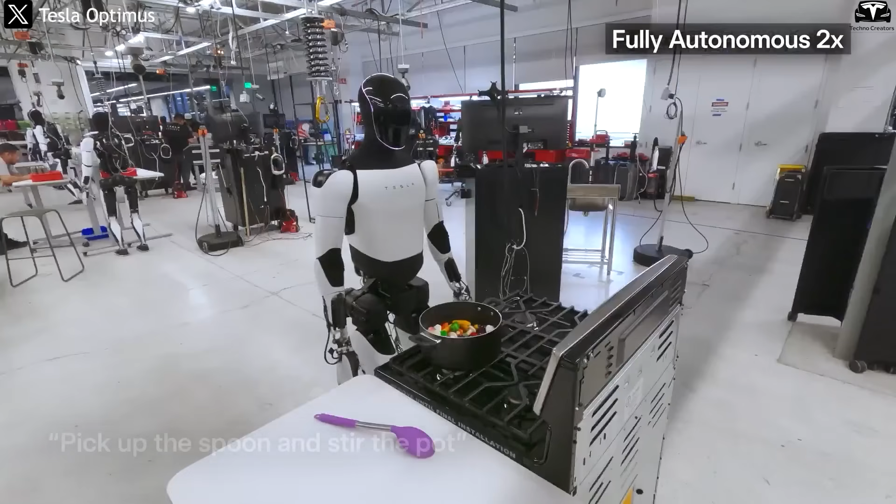Although these are still tests in controlled environments, the flexibility and precision demonstrated by Optimus have raised many expectations. To accomplish such tasks, the robot must possess superior sensing capabilities, excellent coordination of its hand joints, and the ability to respond adaptively to changing real-world conditions, something most robots today still struggle to achieve.

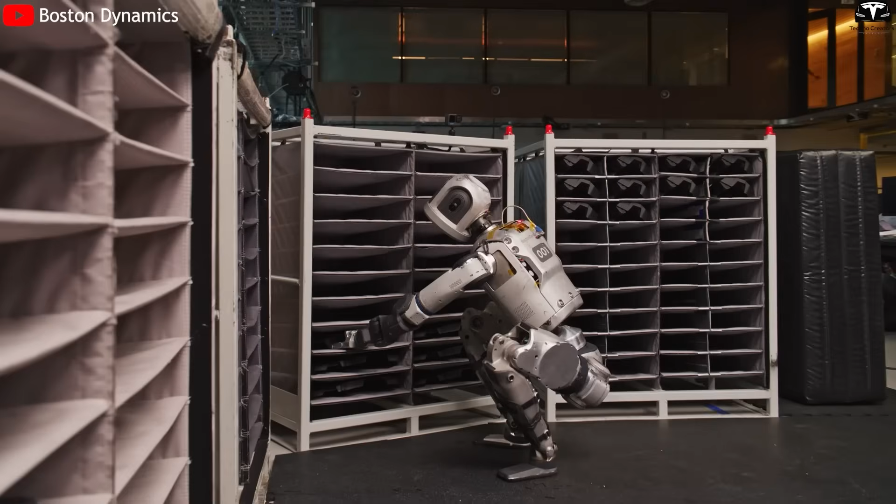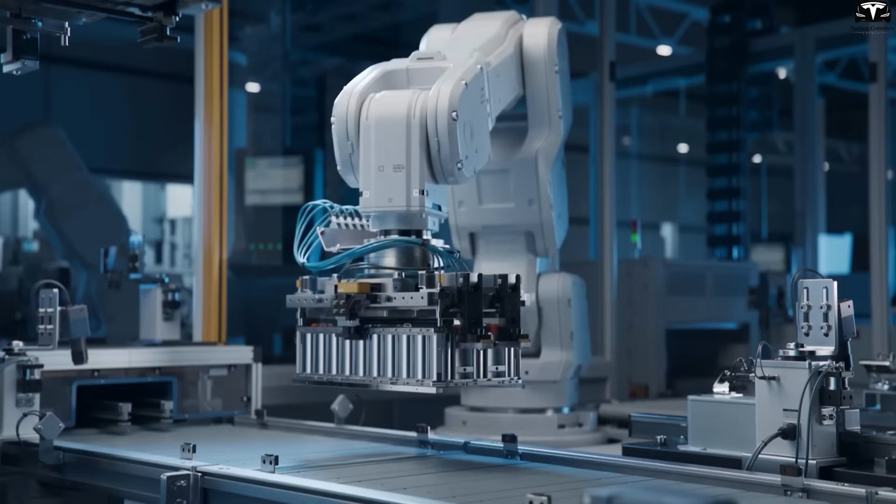Not everyone shares Elon Musk's optimism. Chris Walti, former head of the Optimus project, expressed skepticism, arguing that humanoid robots may not be suitable for production lines where high speed and absolute precision in repetitive tasks are required. According to him, fixed-arm robots, or those designed specifically for individual tasks, remain the better choice for current industrial needs.

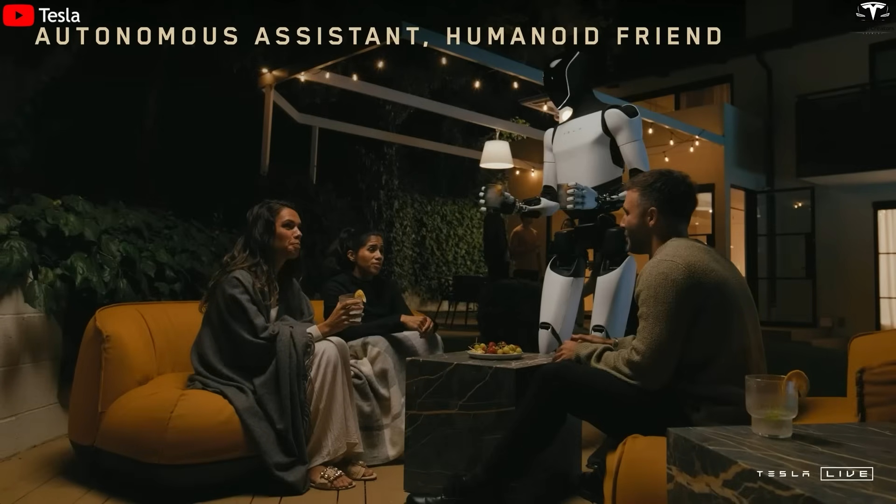So why is Tesla still committed to developing a humanoid robot? Elon Musk has a vision beyond manufacturing. For him, Optimus is not just a work tool, it is a universal worker capable of moving flexibly in human spaces, interacting naturally with the environment, and handling various situations.

Musk believes that in the future, humanoid robots will be able to replace humans in many roles, not only in factories but also in hospitals, schools, restaurants, and even space missions.

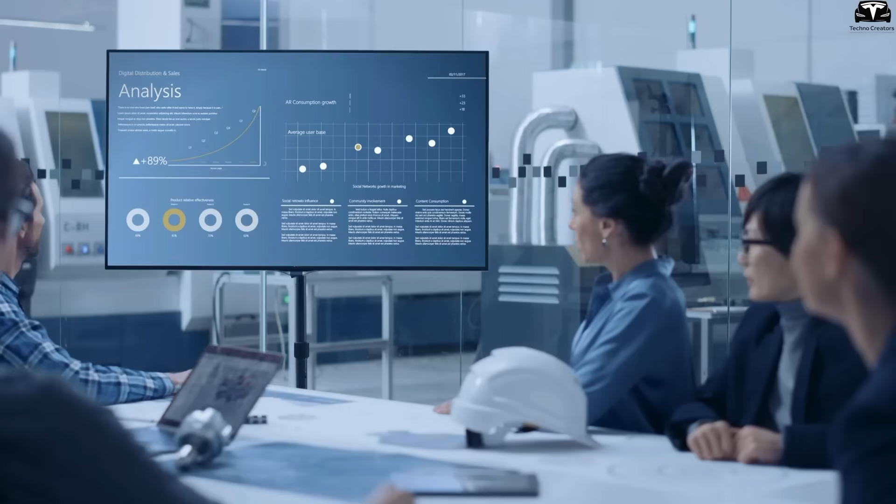How has Tesla progressed into Optimus production? According to the Q1 2025 report, Tesla has begun limited production of Optimus at its Fremont factory. This is a crucial step marking the shift from development to real-world testing. Musk confirmed that Tesla plans to deploy around 1,000 robots internally by the end of this year to evaluate performance and reliability before selling them externally starting in 2026.

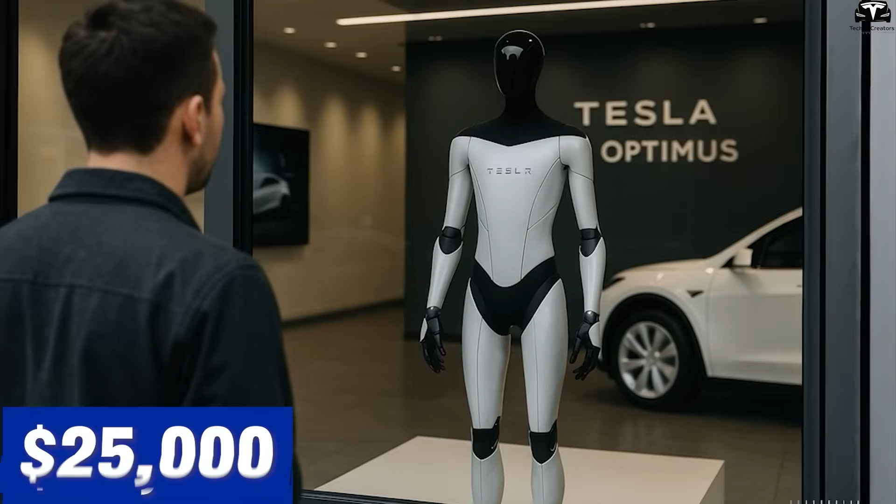Do you think Optimus could become Tesla's next gold mine? If the price range of around $20,000 to $25,000 is maintained, selling 1 million robots per year could generate $20 to $25 billion in revenue for Tesla. And that's only from the hardware.

Once Optimus runs on Tesla-developed AI platforms, the company could also offer additional advanced software packages, OTA updates, and subscription-based maintenance services, similar to how they currently operate with electric vehicles. This opens the door to a much more sustainable and lucrative revenue stream.